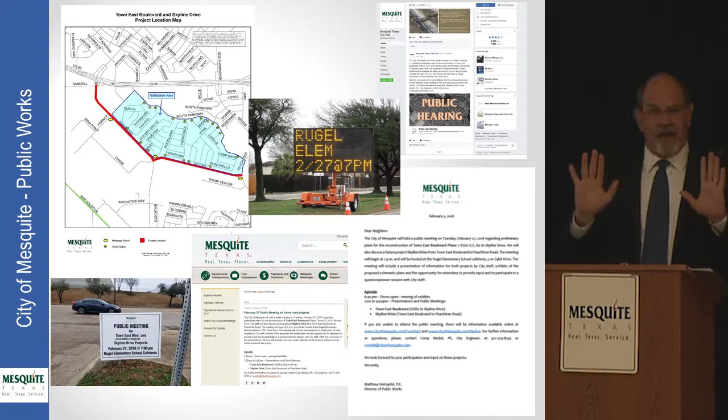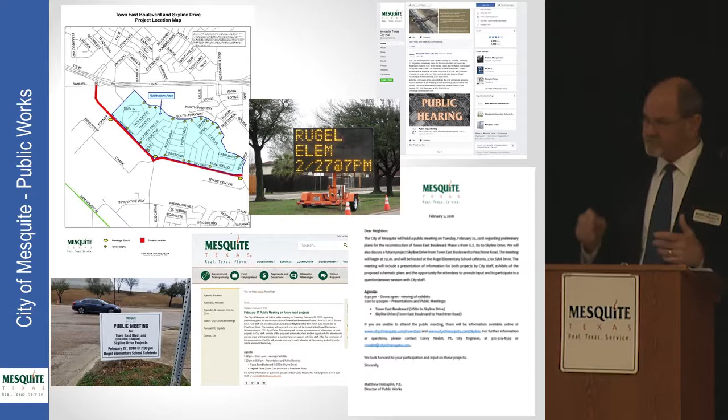So you guys are going to be the keepers and the people that transmit the actual information out to your neighborhoods. You can tell your neighbors, I went to the public meeting, and here's the website links where you can do some research yourself, but this is what I found out at the meeting and on the website. You are agents for change—agents to get the real message out there and do away with rumors that sometimes get started. The schedule: we have this public meeting today.

As Cliff mentioned, you will have surveys handed to you as you leave today, where you can actually vote on the various options for both Town East and Skyline. You're going to be given a stamped, self-addressed envelope to get it back to us.

We're also going to mail out those same surveys to everybody in this neighborhood again—1,100 surveys to all the homes in this area. We're also putting the survey on our website, and that will be available at 9 o'clock tonight. They're going to pop that survey up after these meetings are over.

Once we get all those surveys, we're going to have a deadline, and you might want to write this down, of March 23rd to get the surveys back to the city. That gives you roughly a month, a good 3 weeks, to get the survey, consider the options, talk about it with your family and your neighbors, and vote on an option.

The staff has to collect that information, and we're going to present it to our city council. They're the decision makers. We're going to take the information we get from you, your preferences, and the number of people with certain preferences. We'll catalog and give them that analysis, and then they'll make the decision on which design we pursue for both the Town East and the Skyline project.

We'll probably go back to the council sometime in April, maybe the first or second meeting. The city council will also, I'm sure, solicit citizen input at that council meeting when we present them the survey and the information. So there'll be another opportunity and venue for you to give information and your opinions to our city council.

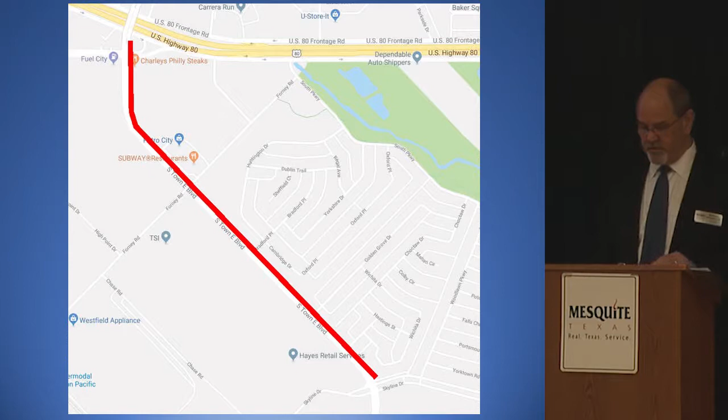Talking about the schedule for Town East Boulevard: once we decide these things, from March to September we're going to design it. We intend to bid this project October to December - it takes about a 3-month process to comply with state bidding regulations. Then we're going to start construction hopefully in February of '19. It's going to take roughly a year and a half to finish, so we anticipate completing construction in summer of 2020.

Okay, segment 1, north of Forney Road. This is one segment we're really not giving you many options on because it's all industrial. This segment has quite a bit of traffic. We've done traffic impact analysis for both Skyline Boulevard and Town East Boulevard, looking at historical counts, current counts, and future projections.

As all this vacant land and vacant buildings - as you know, there's a big building that used to be the Lucent AT&T building at the corner of Skyline and Town East Boulevard. It's vacant. What happens when someone moves in there? What if it's manufacturing? So we've looked at all those vacant tracts and figured out, using what we call a highway capacity manual, how to calculate with different land uses and different acreages of different types of land uses what sort of traffic those are going to generate.

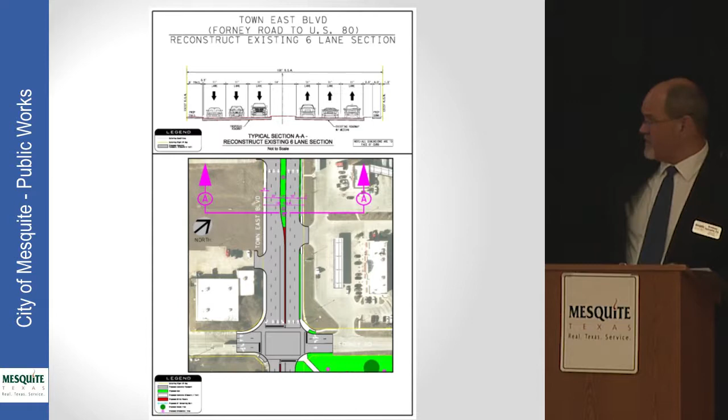I think all of you have seen this display on the walls. I'm going to focus a bit on this actual cross section. You can see this is what we're proposing for this section. I won't spend a lot of time on it because we think this is really the only viable section from Forney up to US 80 to get those trucks out of the Union Pacific Intermodal Facility and to provide the correct number of lanes for the traffic volumes I just mentioned.

So basically, this would give us a sidewalk on one side, and a slightly wider trail on the industrial side. If you remember the bridge over US 80 on Town East Boulevard, the sidewalk is on the west side of the roadway—there's no sidewalk at all on the east side—so we have to move the sidewalk to that side to get over US 80. And we're providing a median for left turn lanes, basically just to carry the traffic.

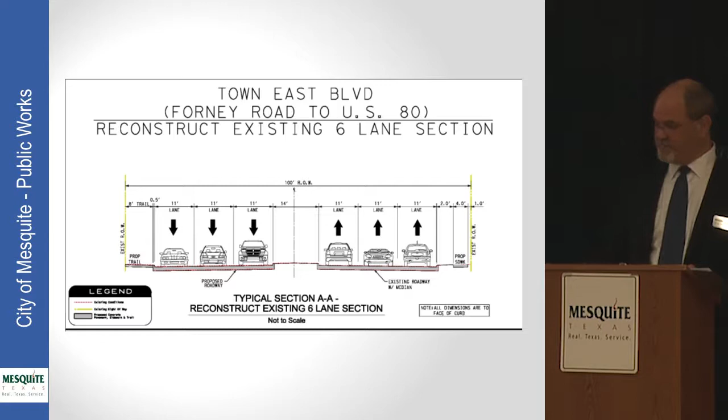Segment 2: this is where we have some options that we want you to pay close attention to, that we're going to offer up to you. This is the section from Forney, as I mentioned, down to Skyline.

We have residential land use there. As you recall, traffic drops down considerably. Our traffic counts right now are 12,600 vehicles a day in this section, closer to Forney. So traffic seems to pick up more and more as you head north towards US 80—it starts picking up traffic from the residential neighborhood and peaks as you go north. But right south of Forney Road, we have that 12,600. So you can see there's a 4,000 vehicle per day difference north of Forney versus south of Forney.

Mainly that's traffic coming out of the intermodal and other facilities. In 2040, the future projection is 15,100 vehicles. The constraints here: we're still dealing with this 100-foot wide right-of-way, and we have lower traffic volumes, but we have this dichotomy.

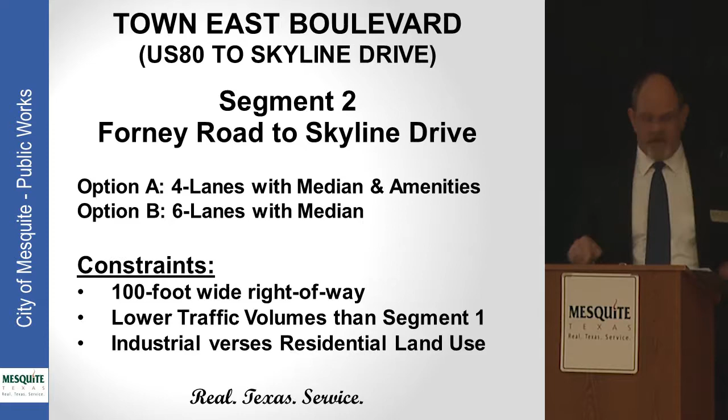We have residential land use on one side—the east side, north side—and industrial land use on the west-south side. So the options we have: we're going to have Option A.

Remember those options—this option is to do something a little different than what's out there now. Right now we have 3 lanes in each direction, 6 lanes total, as you saw on that previous cross section. This option would reduce that lane count by 1 lane in each direction, so you'd have 2 lanes on either side of a median.

What we would do with the extra room gained from eliminating those 2 extra lanes is take the roadway and shove it as far away from the residential homes as we possibly can, pushing it toward that industrial land. This would have some pros and cons, and you can see this.

Number 1, it moves those heavy trucks away from the homes, reducing vibration. We've gotten lots of complaints about vibration and noise, especially from the first and second tier homes closest to Town East Boulevard. We've had to go out there with sound meters, and what we found is that just 10 feet makes a big difference on sound.

So it would dramatically reduce the vibration and noise. It gives us room also to put some amenities in there. We would propose to put in a 12-foot trail next to the homes. It gives us room for some nice landscaping, some trees. We could meander the trail in and out of the landscaping and trees to provide a nice amenity to that neighborhood.

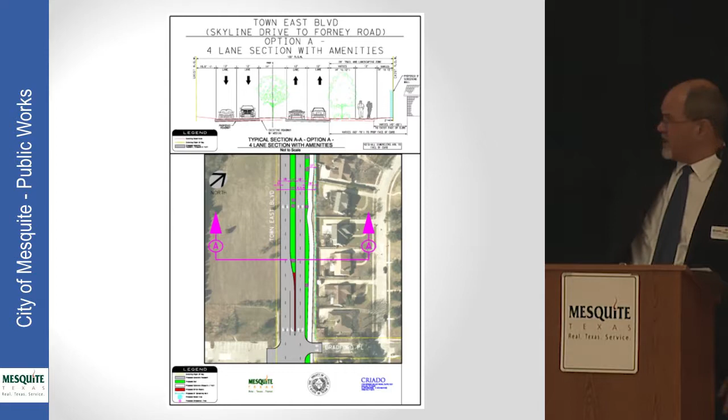So looking at this, again, this is the display. It's kind of hard to see on the screen, but we have blow-ups over here. I'm going to focus in on just this cross section. You can see here, this is Plan A. All these options, both this one and the next one we'll present to you, which is basically build it back like it is. We're going to build a concrete embossed screening wall along the residential.

Now, these are, you think concrete, but these are a newer type where they paint them, and if you've been up to like Academy Sporting Goods, behind the Academy Sporting Goods, they've built an 8-foot tall, not a 6-foot tall like the current fences—it's an 8-foot tall, thick, about 5 to 6 inches thick, screening wall. It has a stone appearance embossed on it. It's painted, looks very aesthetically pleasing, and it's almost bulletproof. That would be built with either option on Town East along the residential homes.

So that's a given. But this option also gives us room for a large buffer. It moves the roadway from 10 feet away from the property line to, you can see, 28 feet. So it almost triples that distance between the homes' property line and the actual roadway. And because it goes from 10 foot to 28 foot, we have room for plenty of landscaping, heavily landscaped. We have room for a trail, and it has those other advantages.

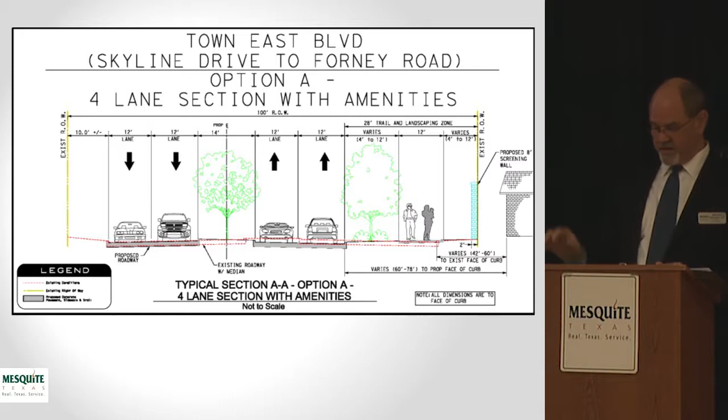Disadvantages, as I mentioned, are kind of the opposite of option A. It keeps the roadway close to the homes. They still are going to have to put up with the vibration, the noise, less pedestrian safety because the sidewalks are very close to the pavement.

It doesn't give us room for landscaping. We will, of course, sod the area between the sidewalk, the property line, and the screening wall—we'll put in nice Bermuda sod and so forth—but there's not going to be room for trees or things of that nature. We do anticipate this is going to give us higher speeds on that roadway, which is an advantage if you want to move traffic, but some people don't want that. We do have lots of complaints on speeding, and it has a higher cost.

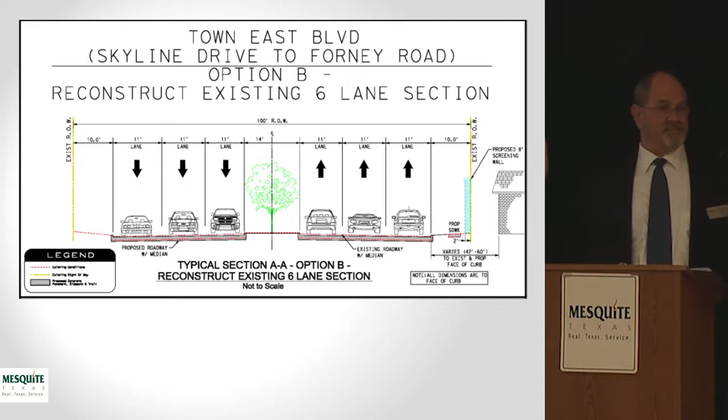This is the option, again, showing what that looks like. These options, because we're limited with a 100-foot right-of-way, we can do one or the other. We can move the road if we eliminate lanes and it gives us that extra room, or we can build basically what we have, okay?

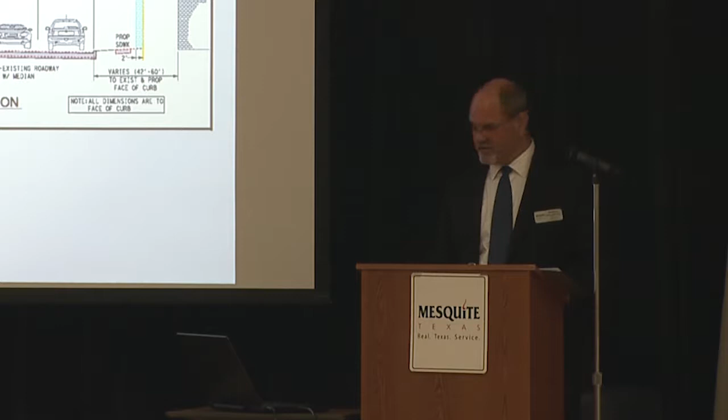And with that, I think I did that pretty quick, yeah, so we'll have more time for public input. That's what we're here for.

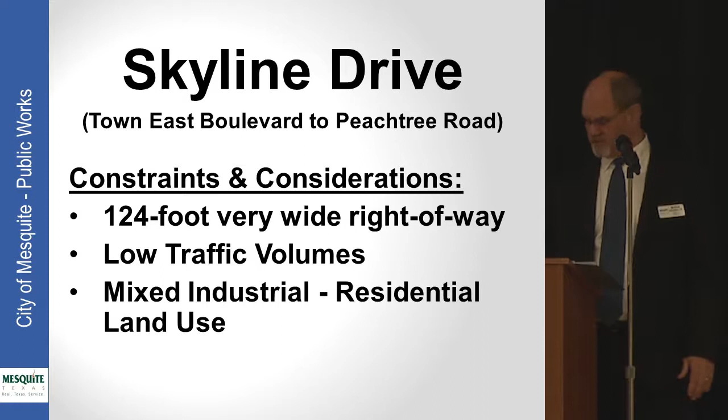This is actually lettered option D in the survey, but it's basically the option to rebuild it more or less as you see it now.

The disadvantages - let's go through pros and cons, these will all be on your survey as well. Traffic closer to homes comes with noise and vibration levels for those homes adjacent to the roadway. It doesn't give us area green space to develop trails and things of that nature - it puts all that green space in this very wide median where it's very hard for people who live adjacent to it to utilize. You don't really want a trail going down the median of a roadway; you have to cross a bunch of traffic to even get to it. So it really doesn't make it a very useful green space if we put all that land in the median as you currently see out there.

It's not going to give us room to do any amenities next to the residential part, and this is probably going to continue the high speeds we're currently experiencing on the roadway. However, if you don't want any change and you're just trying to move traffic as quickly as possible, this is probably the option you want to implement. So it's kind of the no change option.

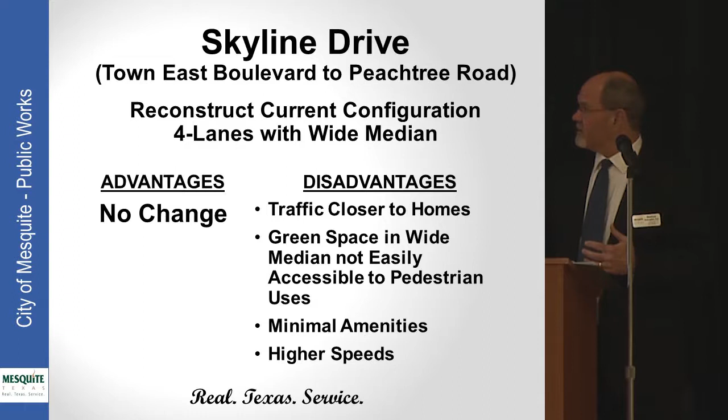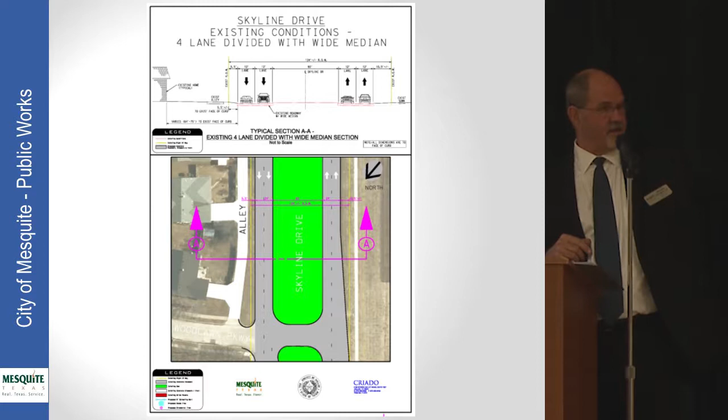You've seen this on one of the screens over here - you can see that's the one closest to me that has the big, wide median. I'm going to break it down: this is what it looks like currently, and this was basically how we'd rebuild it. We would build that screening wall, as we mentioned, between the alley behind the homes out there and the new pavement.

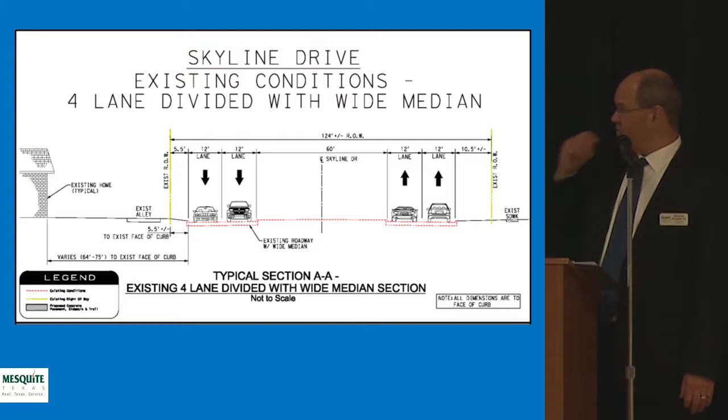I'm going to go on to option A. Option A is the most radical change from what we currently see. This is 3 lanes shoving the roadway as far to the south next to the industrial properties as possible. It doesn't have a median.

So if you look at the long linear drawing for option A, what you'll see is we have a continuous left turn lane in the middle, with through traffic lanes on either side - one in each direction. We would build auxiliary right turn lanes at the heavy movements into industrial properties and into the major streets that feed into the residential area, so you'd be able to get off the roadway without blocking a through lane when making a heavy right turn into one of those streets or entrances. So we think it's a very efficient design.

We think there's plenty of lanes there to carry the traffic both today and what we're anticipating in the future in 2040. And it gives us the largest separation between the travel lanes and the homes. It increases that buffer size between the alley right-of-way line and the pavement up to 77.5 feet. That's a lot of pavement, or a lot of green area.

We can do a lot in that green area. It actually lends itself to building almost a linear park where we can put a winding trail through there, lots of trees and landscaping, and potentially even some park furniture like benches and things of that nature in that area, because there's plenty of separation.

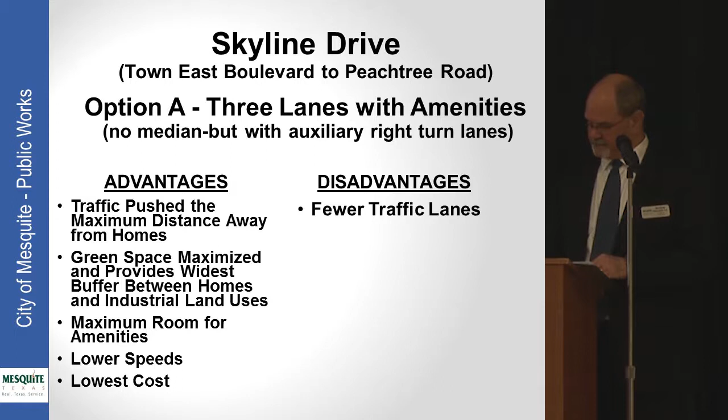I'm going to click away. This is kind of a cross section or a plan view of that, again, that's on these boards over here. Zooming into the cross section, you can see the old roadway is in a dashed line on your left there. You can see we're pushing the new roadway right almost up to 10 foot from the south right-of-way line. That gives us that gigantic buffer, lots of room for trees, trails, and other amenities.

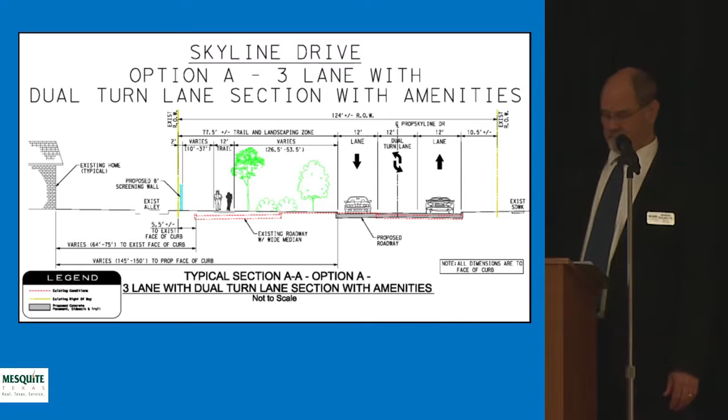Okay, option B, kind of a little bit different, a little bit of a twist. So on option B, we add another lane. Remember, 3 lanes option A. This goes to 4 lanes, but they're 2 through lanes. And because we have 2 through lanes, we would not build those right turn bays into the major streets and drive entrances into the industrial area. You'd have 1 lane in each direction. Of course, we would flare it at the major intersections, adding additional lanes at Town East and Peachtree ends.

This has many of the advantages of option A. It still pushes traffic away from the homes, not quite as much. Instead of a 77.5-foot buffer, it drops down to 65.5. So roughly you lose 12 foot of that buffer. May not seem like much, but you have less green space, less opportunity to use it as a linear park. Still gives us room for that trail and trees, though.

Option B will reduce noise and vibration to the adjacent residential area, but of course not as much as option A. And because we're adding that extra lane of traffic, it costs a little bit more. It is a disadvantage: you will have higher speeds, and traffic moves a little bit closer, that 12 foot closer to the homes, as a disadvantage.

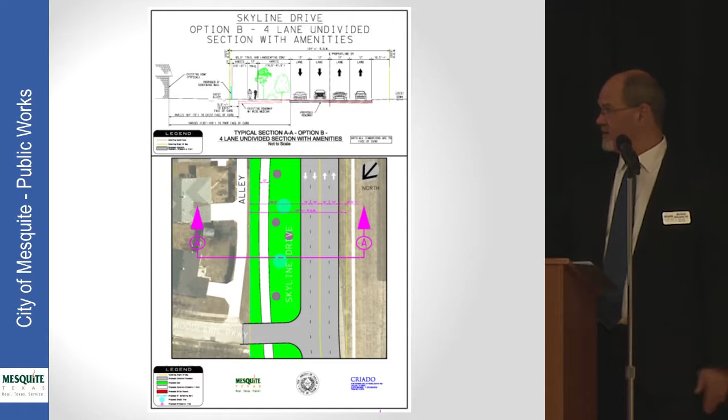All these will be on that survey, by the way, and available on our website. This is the cross-section available over here. Again, this is very similar to option A, except you see there are 4 vehicles there, 4 lanes of traffic, 2 in each direction. Slightly smaller buffer.

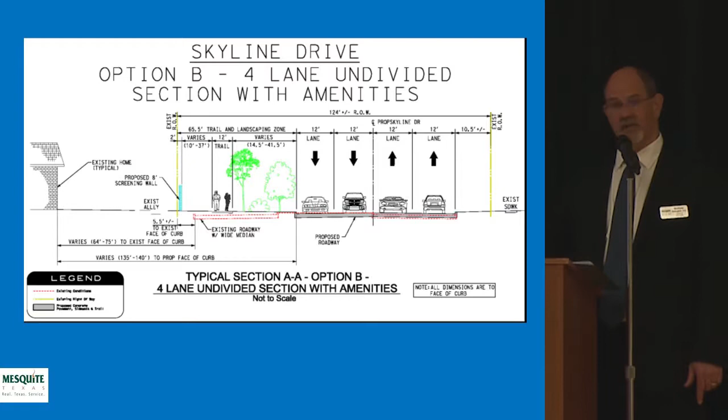Okay, option C is kind of a hybrid with the current option. Right now, remember, we've got this big, wide 66 or 60-foot wide median. This is keeping the median, but it's still taking the roadway and shoving it as far to the south as we can. Because we're adding that green space in the median, our buffer gets smaller still than either option A or B. But it's giving 2 lanes, kind of like we have now, on either side of the median, but the median would only be 13 to 14 foot wide.

So it's going from 60 foot wide to our normal, what you see on Town East Boulevard, which is a 13 foot wide grassed area. If you count the curbs, it's 14 foot wide. This drops our buffer down to 51.5 feet.

So option A was 77.5. We go to 65.5 on option B. This drops it even further to a 51.5 foot buffer on option C. There is still room, it still gives a lot of grass area, still gives us room for that winding trail, some planting of trees. Option C has some reduction of noise and vibration to the residential neighborhood, but again, not quite as much as option A or B.

So really, they're all kind of good options, depending on what you want to do out there. The last 3 options all increase the buffer between the residential area and the roadway, it's just a matter of degree. Again, with this option, just like what we have now, since you have that median, we expect speeds to be pushing 40 miles per hour, maybe more, like we're currently experiencing. So it's not designed to slow down traffic. That's a disadvantage. And of course, this is the highest cost option out of any of them.

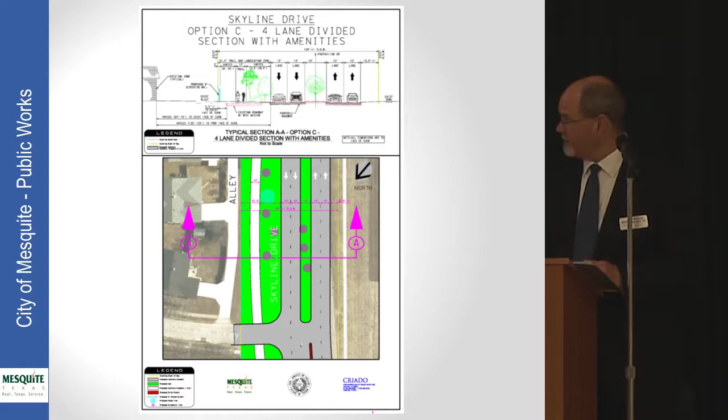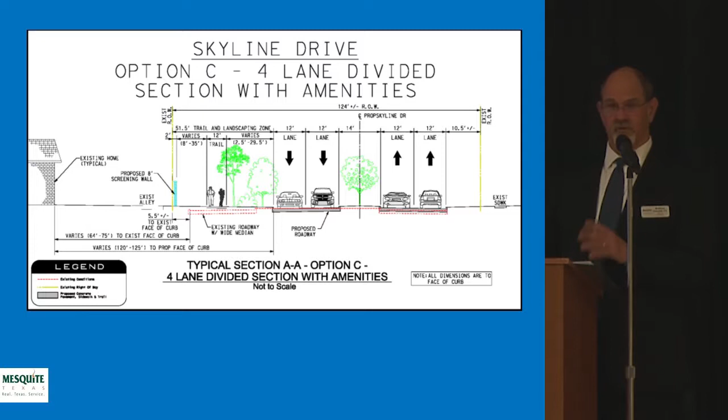And this is kind of that cross section. By the way, all these cross sections and displays that you're seeing here tonight are available in PDF on our website as well. So send your neighbors to those.

We're going to start our public input process. We have 4 options, but they're all very similar and have pros and cons. I kind of ran through them pretty quickly. But we'd like to have people up here, kind of the same process as before. Corey, if you could help me with this.

We would like you to state your name and address. Just for the record, you're being filmed. And speak clearly into the mic if you can, and we'll try and answer any questions you have and certainly record your opinions. Try and keep your comments on the Skyline Drive project as much as possible, and what we're trying to do, and express your opinion on which of the options are important to you, and we'll try and get to all of you if we can.

Go ahead, ma'am. I'm Shelley Kubasumi, 2907 Potomac. I just have a couple of questions.

First of all, when you're making that trail, right now it's a trail to nowhere. Are you going to hook that trail up with the Town East and then also make some type of walkway that hooks to the park and the parkway so that it becomes a trail that you can... I'm a walker, and I don't like to just stop and have to turn around. I would prefer it be continuous. Are you planning on doing that? Yes, we are, ma'am. Okay.

The city actually has a master trail plan that's on the Park Department website. All these things, we're kind of building it bits and pieces, but it's part of a master plan. As we talked about on the Town East Boulevard one, that one option that we presented would build a trail all the way down to Forney, and then along that Forney Park, it would connect into the parking lot there, and that eventually feeds into the trails that are along South Parkway and things of that nature.